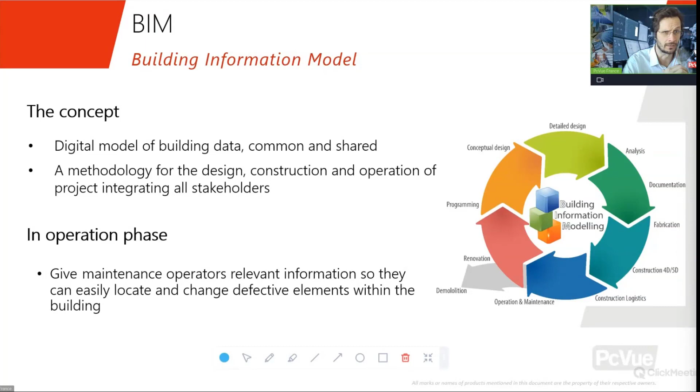So if we focus on the operation phase, so for the operation and the maintenance of the building, this building information model should give the maintenance operators all relevant information they need, so they can locate and change any elements within the building which need to be changed, for example. So this building information model should be the link between the designer, the builder, and the operation teams.

So in this context, how can PcVue help? Basically, PcVue is the link between the BIM reference model and the operation of the building. So within the PcVue platform, we can visualize the BIM elements in 3D, and not only the 3D graphics, but all the information and the metadata of the BIM reference. So we import an IFC file, and we can visualize through a BIM 3D viewer all information and graphics from the BIM reference. So the maintenance team and the operation teams have the latest data for the building to help them maintain the building and all its components.

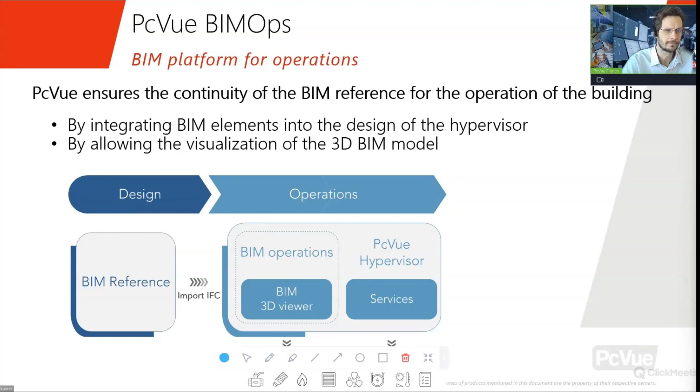So if we dig into all the features, as I said, we have a 3D BIM viewer, so you can display and navigate through a BIM 3D model. You can access any properties of any object of the model. It's based on IFC files, and it also supports XBIM files.

The added value here in PcVue is that exactly the same way you animate an object in PcVue, you will be able to animate any object in the 3D BIM graphics. So we'll give you some examples, but basically you will be able to change the color, to zoom, to show or hide, and so on. So the BIM interface takes advantage of everything you are used to doing and using in PcVue graphics.

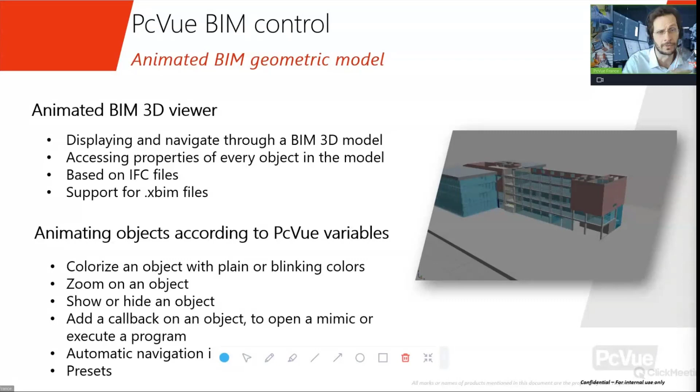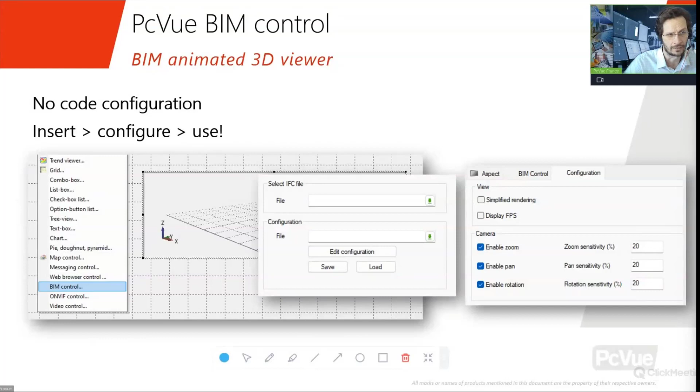It's really easy to use in a project, because basically you just insert a component in the graphic interface, you select your IFC file, and that's pretty much it. And you will display the BIM model in 3D. And as you can see, this model is linked to many properties that you can get from the dialog box. And as I just mentioned, you will be able to create very simply animation to color or to perform some action on the 3D view.

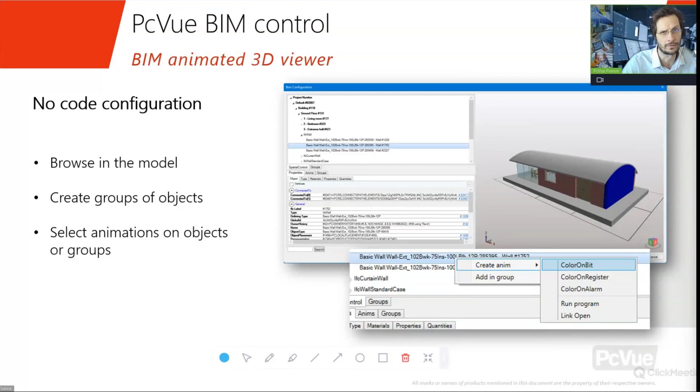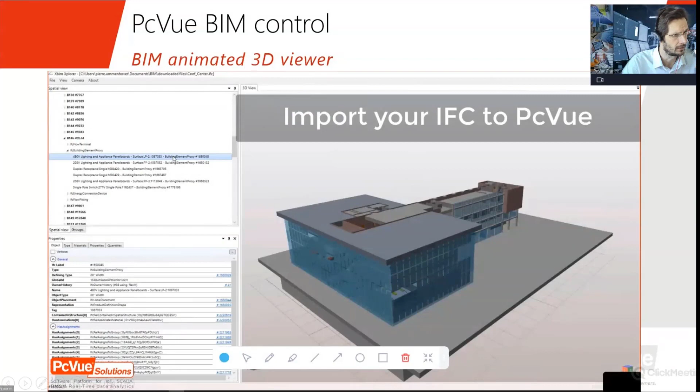Okay, so we designed this BIM control in a way that it's really easy to use, and it's really a help for the operation. So here is a short video to show you how it looks. So as you can see, you import your IFC simply using the BIM control from the menu. You select your IFC file, and then you can visualize in real time your building.

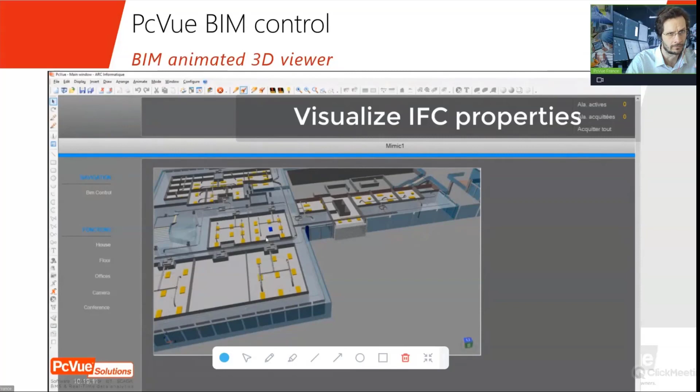You have several layers. You have some alarms, and you can also select a specific property or object. It's possible to set some camera presets and several cut planes. You can select a list of views. You can open a pop-up from the 3D view.

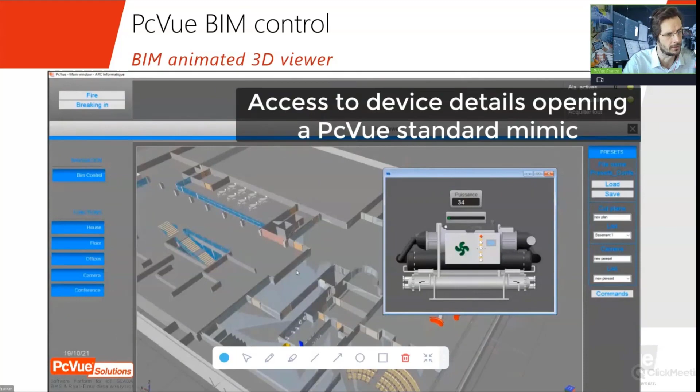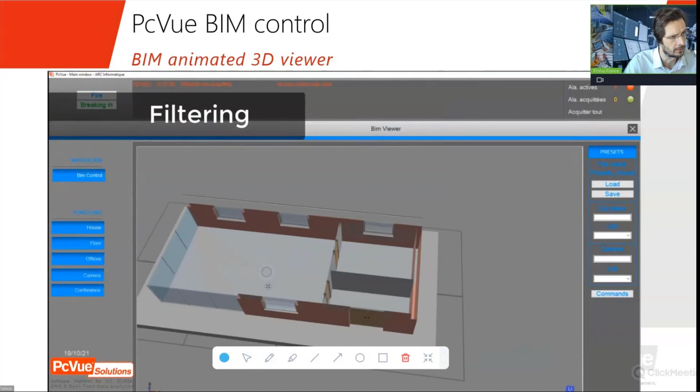So let's say you have an alarm. When the alarm is detected, automatically the BIM 3D model has a blink color, for example, and you can acknowledge the alarm on the system, and it will be automatically changed in terms of color. So if we go more in details on the specific features, as you can see, the BIM viewer can basically play with the view as much as you need, and there's almost no limit here for the color, for the zoom, and so on.

So this BIM integration into PcVue is really important for operations, and PcVue is really the link between the BIM reference and the operation and maintenance team using PcVue. The second facet of what we integrated in PcVue 16 for the building is a solution for safety and security.

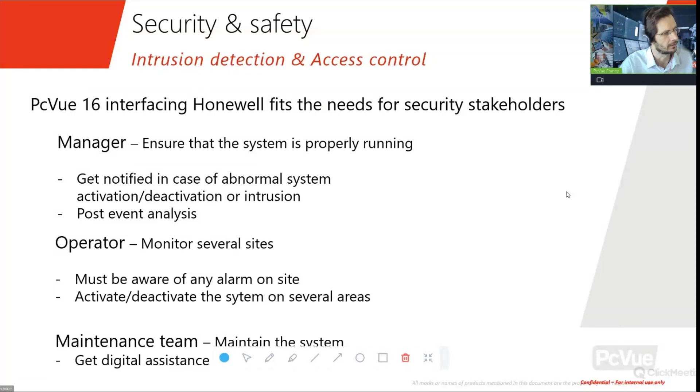In addition to this SIA driver, we did work on video interfaces within PcVue. So the goal here, and that was a request from our users, from our customers, is to be able from PcVue to contribute and to help with people's safety and asset security. There's also a need to check activities of assets with live video stream, and it's really important also to be notified in case of events and then watch what is happening.

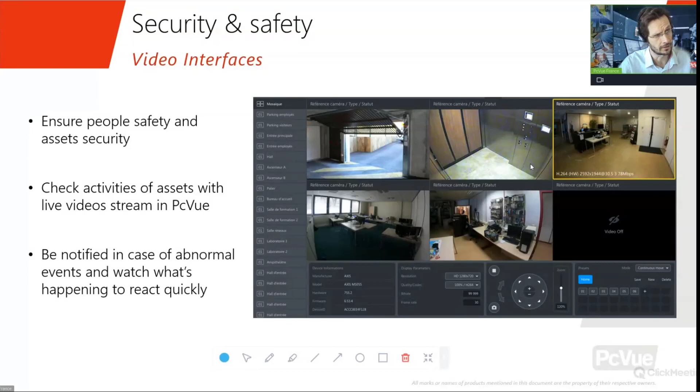So there's a need and a request to be able to have some video within PcVue. So we worked on that, and today we have integrated the ONVIF standard, so ONVIF for Open Network Video Interface Forum.

So this is basically a standard created and designed by major companies in this area. ARC Informatique, the editor of PcVue, is a member since 2021.

Today, ONVIF allows connecting to many compatible cameras and getting the video flow from those cameras. It's important to note that ONVIF has several profiles, and depending on the profile, you have different features.

In PcVue 16, we have ONVIF profile S. This means it's for IP-based video systems, and you have access to video streaming and configuration. You also have some predefined camera positions, and you can save and load presets and select the preset you want to apply.

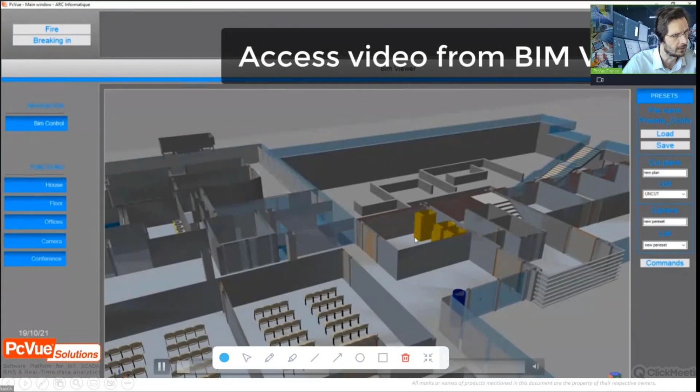So here is a short video once again to show the video. Here you have an example of a list of videos that you can select, and you can zoom on a specific device. For example, you can move through the image, and you can control the zoom with the PTZ and where you want to see the video.

You can also do a snapshot of the video and save it as a picture, for example. It's also something that is possible here with the video ONVIF. But once again, we cannot record the video flow - this is not the goal here.

So this is the end of the session. There are some questions, so I can try to answer some questions I have regarding the video, for example.

There's a question here about whether PcVue can be a VMS. As I mentioned, PcVue is not a video management system, and it won't be - that's not the goal here. But we can connect to a VMS to get some video or information from it, and we'll do that with the RTSP protocol. It's not possible using ONVIF to connect to a VMS, but we can use RTSP to get the video flow from a VMS. So PcVue is perfectly compatible with VMS to get information and have all information in a single interface.